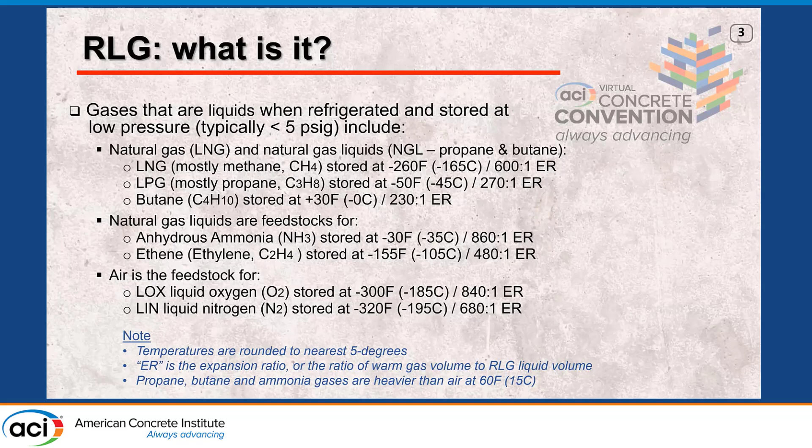So the purpose of ACI 376 was basically to provide a code for concrete primary and secondary containment for the RLGs, meet the regulatory requirements, and also for standards writing organizations, and to be a reference document for project specifications. Okay, so specifically, it was to address the original request from NFPA 59A that they could use 376 as a reference document.

Our other target audiences are the regulatory bodies, which are basically two of them. I'll start with FERC, the Federal Energy Regulatory Commission, and they're basically about licensing and siting, and they have a whole list of things that they go through.

And there's only one that affects us directly, and that's assessing the suitability of the system being used. The other one is PHMSA, which is the Pipeline and Hazardous Materials Safety Administration, and their function is basically to set standards and enforcement. Anything that is hooked up to a pipeline, they have jurisdiction over. And for all practical purposes, you'll have to satisfy their requirements for any kind of RLG storage in one fashion or another.

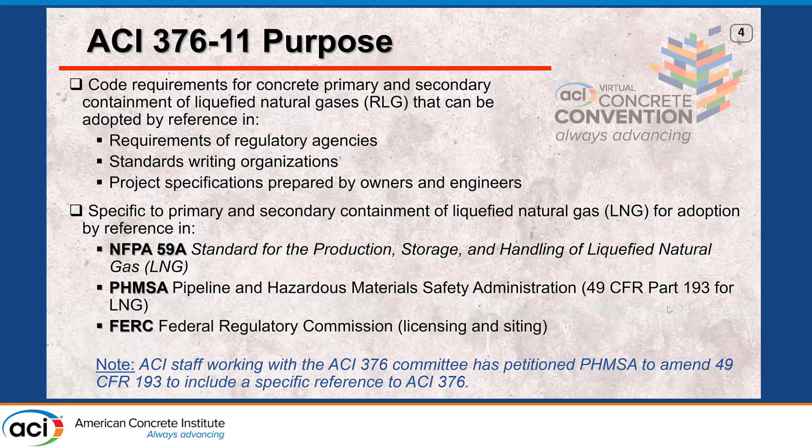Configurations. We basically have four different types of storage configurations. One is what's called single containment. You have a single container, and it's usually surrounded by an earthen dike or some sort of a bund wall that is at some distance from the container. This is a single structural system.

The next category is this single system enhanced by some sort of a secondary container that is also a structural system, usually close in, within about 3 feet or a meter. And the secondary container is open to the atmosphere. And then the third category is the full containment, which in its modern version for LNG typically is an open top primary container that is enclosed by a secondary container with a roof, and that contains the vapor pressure. This has two structural systems.

So throughout all these discussions, you're always looking at, do you have just a single structural system or do you have two structural systems? And the fourth category, which I haven't listed here yet because it doesn't show up in 376-11, is the membrane tank, which is a single structural system, but has two containment systems. A membrane stainless steel liner for the primary container, and then the actual pre-stressed concrete container is the secondary container. But as a structural system, the pre-stressed concrete serves both functions. Okay.

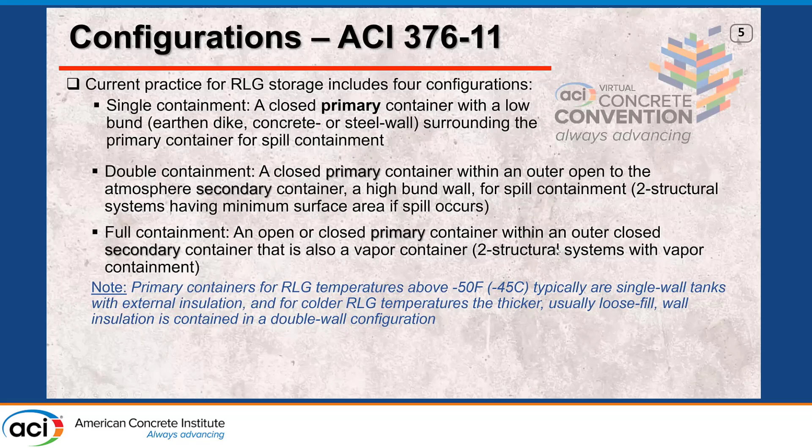And one final thing, for the warmer RLG liquids, typically above minus 50 degrees Fahrenheit, minus 45 C, they tend to be single wall tanks with external insulation, unless you're using a full containment system, and then they're similar to the colder products. And 376 is basically written around the full containment system. You'll find them in almost all import-export facilities that are being built these days. Not everyone does it, but the reason for using the full containment system is you can get more containers in a given space.

If you look at this, here's an open top tank. It's designed to carry the product load. It's topped with a suspended deck which has insulation. With containment of an RLG container, you'll find that the entire space needs to be encapsulated by insulation. So you have the roof insulation, the wall insulation, bottom insulation. In a full containment, this will typically be perlite, loose fill. This will be load-bearing foam glass blocks, and the roof insulation is typically fiberglass.

So if you look at this primary container, most of the ones that have been built have been steel. We'll get into the concrete ones a little bit later. A lot of single containment tanks that have been built with a dike around them had a steel tank, open top like this with the roof. Then they had a carbon steel outer container that went all the way around, and it was the vapor container and also the weather shield and the insulation container.

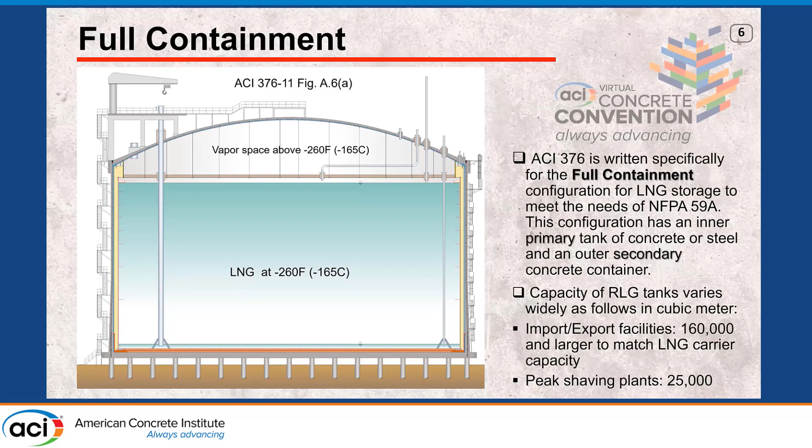The fundamental detail of, again, this is the full containment system. They tend to be built with a monolithic joint at the foundation to the wall, pre-stressed vertically and also horizontally. This creates a problem for two things: mechanical loads and thermal loads. When you have a spill, the assumption is that your primary container has been compromised, possibly by a maximum earthquake event, and that you get a slow spill into the annular space.

And because of the minus 260 degree Fahrenheit liquid impinging on essentially an ambient temperature wall, because this is loose fill insulation, you provide a corner protection here that is of suitable material for LNG. It's 9 nickel, and you anchor it into the wall. The top detail has to do primarily with supporting the roof.

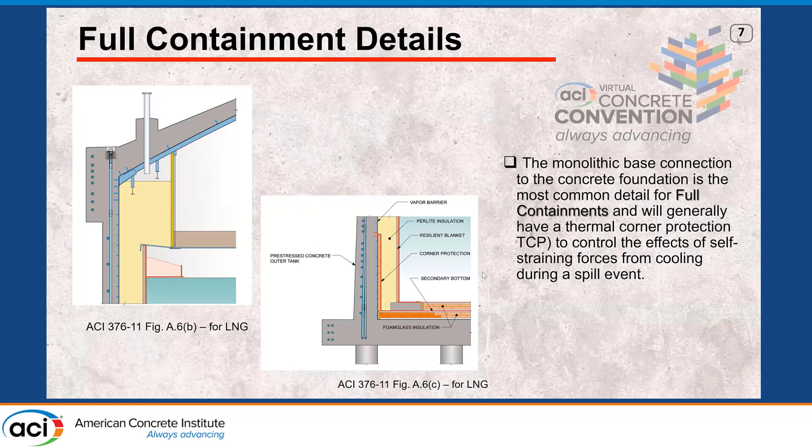So if you're designing one of these, it's generally pretty simple. You spend a little bit of time coming up with the basic cross section, then you spend the next 6 months working with the boundary conditions.

And I'll continue on with the thermal corner protection. One thing we did, this is new for the second edition. We went through and provided details for executing the corner protection that would be considered suitable. And we have 4 different flavors of it. I won't go into the details, but they basically get into addressing the region above the thermal corner protection. This would be 9 nickel steel for an LNG tank. Everything below here would be the insulation space to keep this space warm.

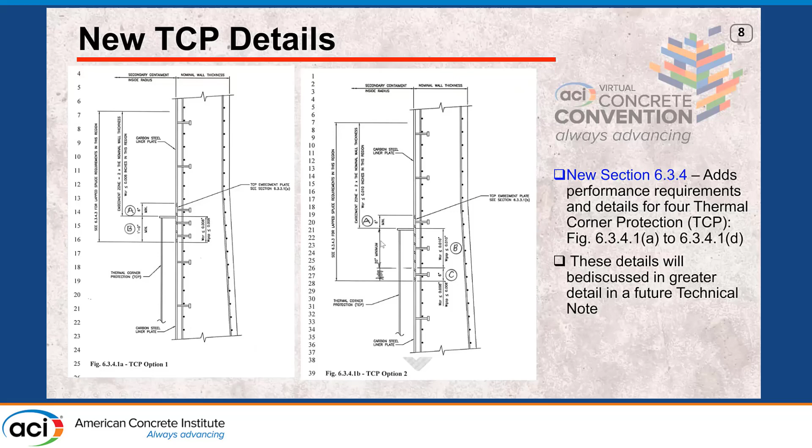And it's all about anchorage and preventing leakage coming behind this embedment, because this is typically carbon steel above the thermal corner protection, and it's not suitable for exposure to LNG. You can expect it to crack if it gets that cold, and so the assumption is that the liner will not be effective in a spill event. So we came up with 4 different flavors of it, and I won't go through that here, but that's what they look like.

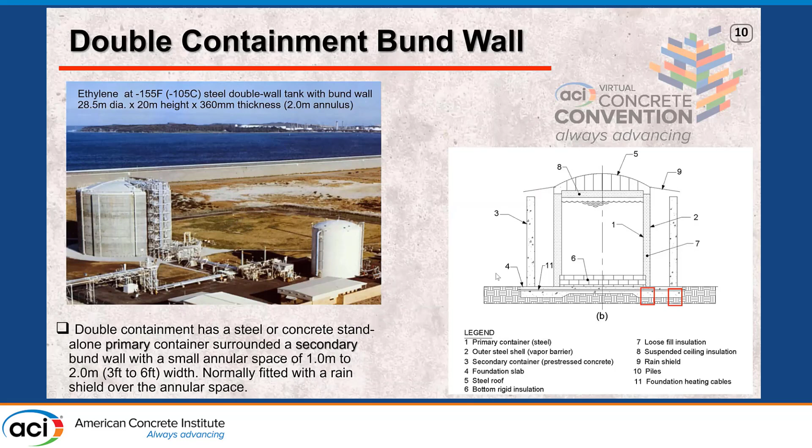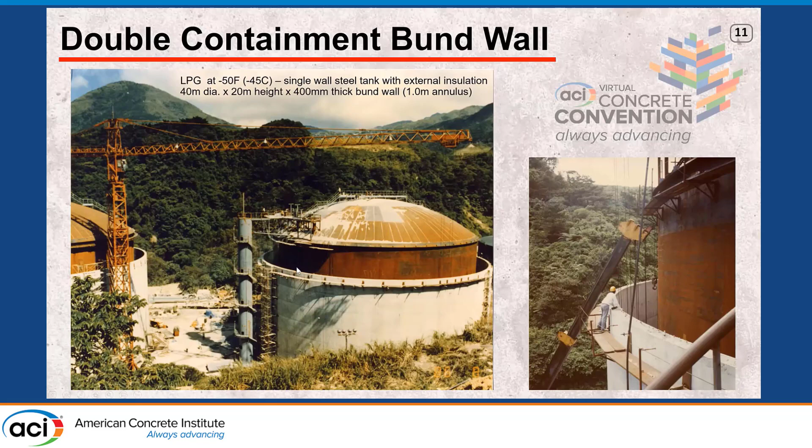Here's the true structural system. Let me back up. The primary tank contains the liquid. In the event of a spill, you have the secondary container acting as a structural system to contain the liquid. The advantage is you have a very small... Here's some more examples. Let me jump to the end of this then. And for anyone interested in this, the slides are available.

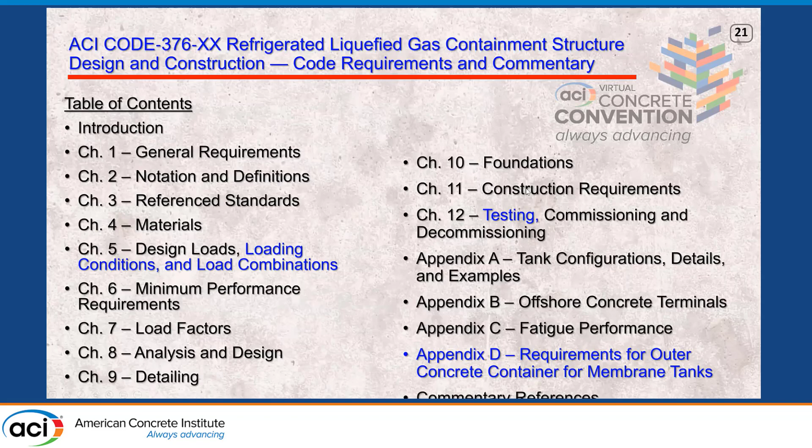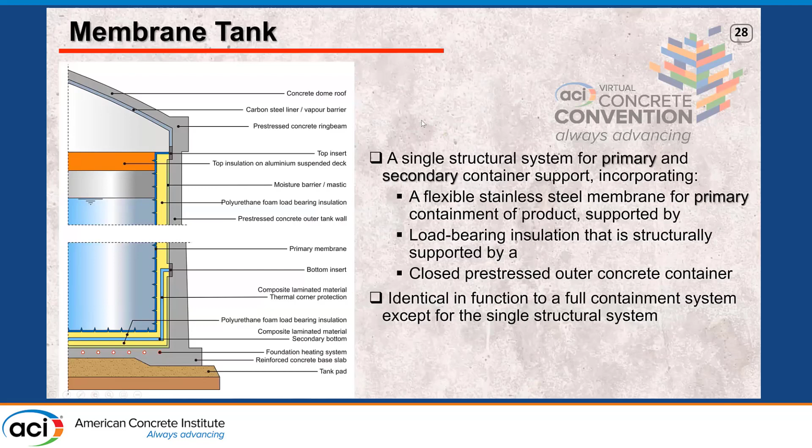Here's what we did for the second edition. Basically, we took up all the future action items from the previous edition. We added the membrane tank, and lots of updates. The document outline is unchanged. Here's a list of the things we went through, and here's the membrane tank, which is very similar to that, and the details there.

So where we're going in the future with this is we expect to be done early spring with the second edition. And for the third edition, we're going to integrate Appendix D into the main body and change the format to ACI 318: terse language, lots of lists and tables. And then looking at possibly a reference standard that would address usage outside the USA.